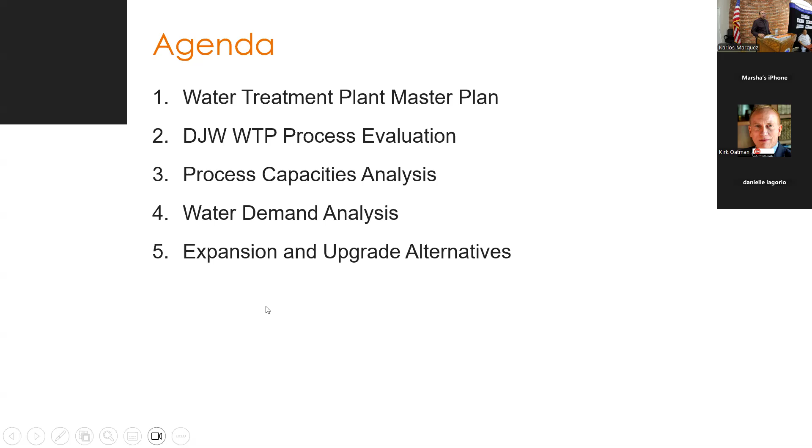Okay, so I'll try to be brief, I think I have about 20 minutes. Stockton East Water District, for those who don't know, is a wholesaler of treated water. We also assess for groundwater use and surface water use for agricultural customers. But we are, in essence, the main provider of drinking water to the greater city of Stockton.

From 1991 to 2011, Stockton East provided roughly 66% of the city's drinking water. Since then, after the city of Stockton built their Delta Water facility, Stockton East still provides about 56% of that drinking water.

We have two master plans that we've embarked on. One of them is the drinking water treatment plant master plan. It is an older facility, built in 1976. For decades we enjoyed the newness of new equipment, so we had a period where we were just cruising along. Now, however, after almost 50 years of operation, we have a lot of things in the pipeline, not only for repair and replacement, but also for improvements, looking ahead to the demands of the city of Stockton, as well as to improve water quality and address regulation, which is always present in the state of California.

So the first one that we'll go through is this master plan. It is being worked on in conjunction with Stantec, that's the consultant.

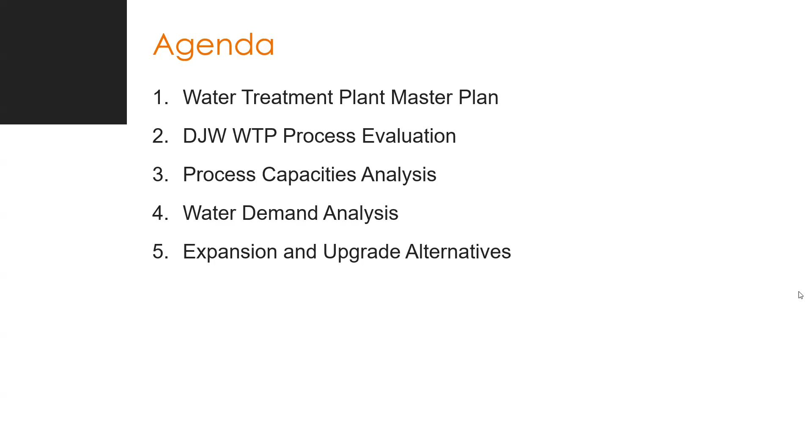I can't go forward. Oh, there it is. Okay.

So the purpose is to look at the treatment plant holistically and come up with a 50-year plan with a 20-year CIP. The plan is to improve the facilities or replace aging infrastructure within a 50-year span, but we're going to be more granular in the 20-year time frame and come up with actual numbers for budgeting purposes and fiscal planning.

The approaches were to manage, optimize, and sustain all water sources, which is very important in California, especially during drought years, and to operate, maintain, and modernize processes and facilities. This is an ancient facility, so that's very important.

So what is it that we are going to do now? We are going to look at all the original components, including some very expensive ones, which is the power side of things, some of the filters, and the flocculation and sedimentation infrastructure, which is fairly old, so that needs to be replaced in the near future.

The challenges, as always, are regulation, water sources quantity and quality, and the expectations from our customers, which as a wholesaler are the city of Stockton and Cal Water. We treat the water and send it to those two main entities, a little bit to the county of San Joaquin, and they're the ones that distribute it along their distribution system. They're the front-facing portion of drinking water; we're the back end. And the last two bullet points are land use changes and building codes.

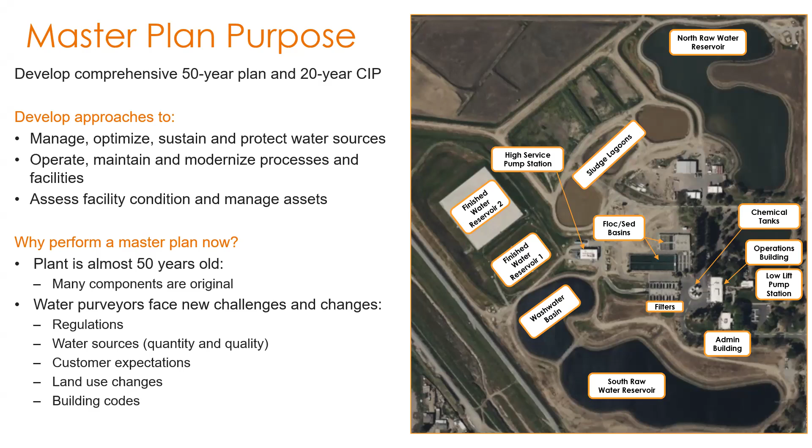This chart shows on a year-by-year basis what we've seen historically as far as average demand. As you can see, prior to 2013, we had a lot more demand because the city had not built their plant at that point in time. But recently, especially with some of the issues with tugboats and whatnot in the Delta, our demand has kicked up. There's also been more development within the city of Stockton, which has driven demand up significantly in the last few years.

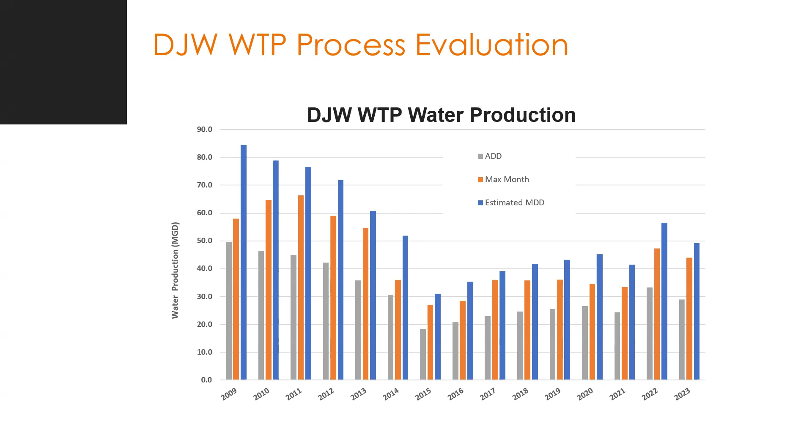So this is process evaluation. We have two sources of water that go to the treatment plant: one is New Hogan Dam, and the other is New Melones Dam. New Hogan is rain-fed, while New Melones is snow-fed. Snow-fed is always a better source of water, and as such it has less turbidity and less organics.

But when we go to New Hogan Dam, we do have some concerns from time to time with a lot of organic compounds in the water, and there's been historical issues with taste and odor. Now taste and odor issues are not noxious to health, but whenever anybody has anything unpleasant in their water, the public tends to panic a little bit. So we try to eliminate those, even though they're not any health hazards whatsoever.

So in order to combat some of those challenges, the master plan is evaluating new flocculation and sedimentation basins, which perform better to eliminate some of those organic compounds and turbidity. Granular activated carbon is used for taste and odor control, and the district has implemented fairly frequent changing out of that granular carbon. We do it right now every year in two intervals: at the very beginning for the previous year, and again 2 months later to make sure we have fresh carbon to address those issues.

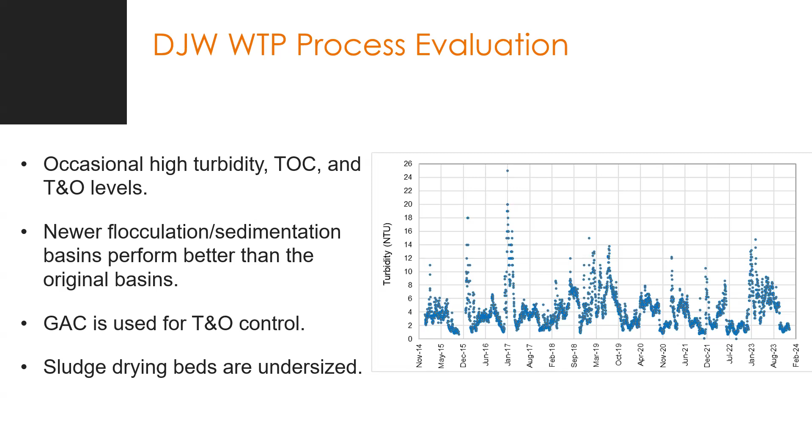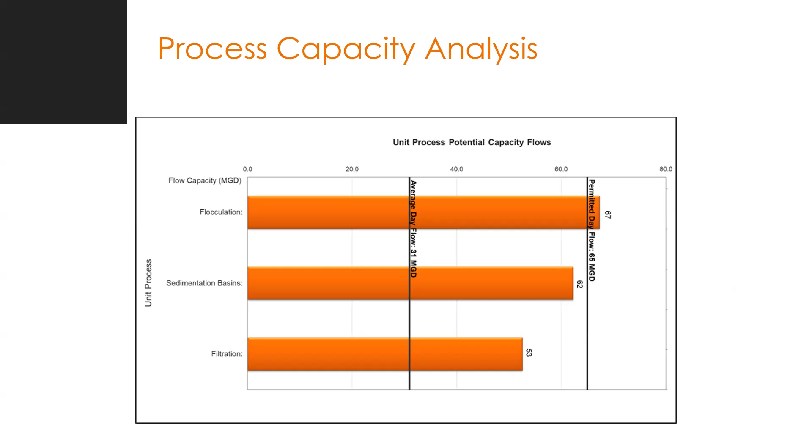As far as process capacity, the treatment plant is rated for 65 million gallons per day. For flocculation, we are actually a little bit above what the treatment plant is rated for, but we are a little bit behind when it comes to filtration and sedimentation, which are the other two processes when we treat water. So this master plan is aiming to modernize our facilities to make sure that what we're actually rated for is something that we can actually produce.

So I'll skip through these. These are just the options to get us to that point. And then this specific graph is...

This is a graphical depiction of how we deliver water to the city of Stockton. As you can see, we deliver to Cal Water, to the north side of Stockton, and to the south side of Stockton. The south side of Stockton is served a lot by the Delta Water treatment plant that the city of Stockton owns and operates.

In the last several years, we've had an uptick in that demand. So we have to look to the future and make sure our facilities are optimized for future increases in demand, which we're anticipating as well.

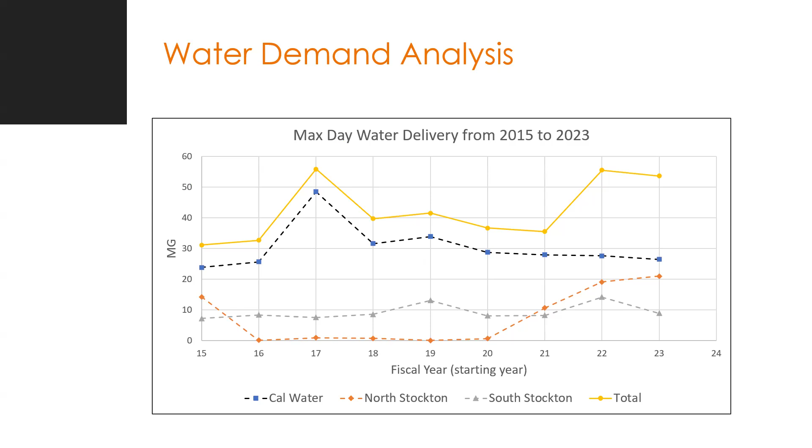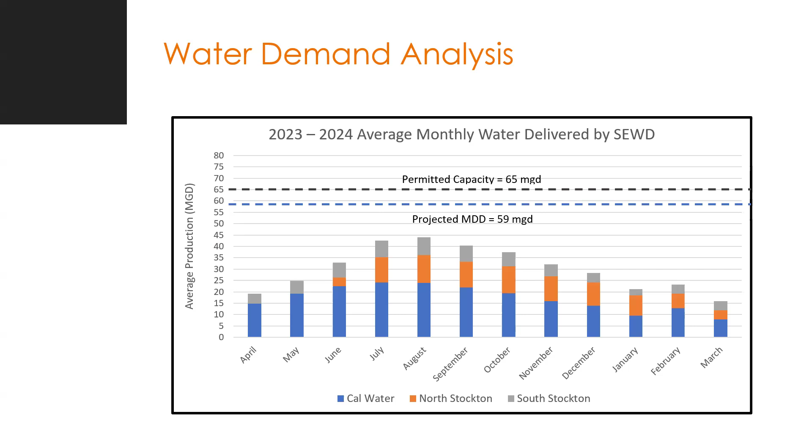But these options have been presented to those two entities and the county of San Joaquin. They're what we call the urban contractors. We have a contract with them to provide water. And so anytime we have anything major, these are going to be multi-million-dollar projects. Therefore, we try to engage them as early as possible to make sure that we get buy-in to come to a viable alternative.

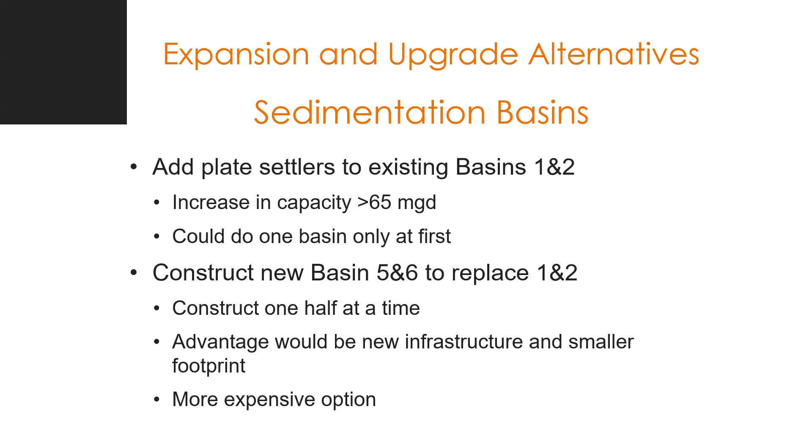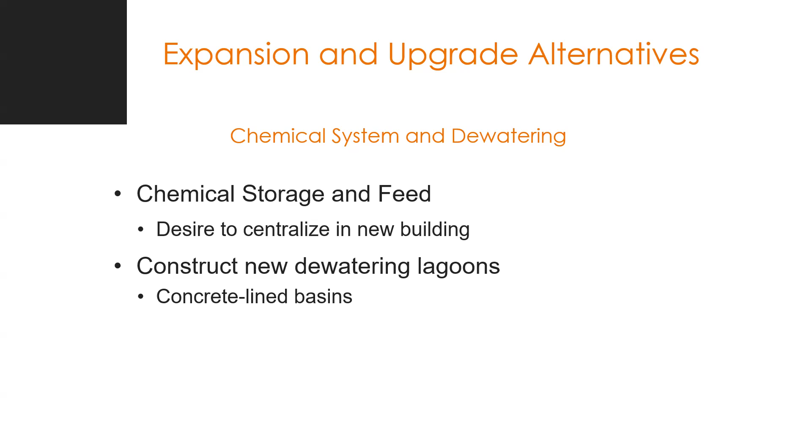And that's pretty much it for the water treatment plant master plan. Any questions? I know I went kind of quick, but if there's anything...

Yes, I have a quick question. You guys have assumptions, obviously projections in the future, 5 to 10 years. Obviously, business community, we're the attraction of businesses to our community, San Joaquin County or Stockton in particular. What are your projections? Because obviously water is a huge driver for economic development in our community. So what are your projections of the needs? Is it reliable? Are they doing any groundwater recharging, et cetera, and so forth?

Yeah, so actually, that part of our planning is more on the water supply side. This is more related to water demand. So as far as the city of Stockton and Cal Water, there's not a lot of growth on the Cal Water side, but there is a lot more on the city of Stockton side. We still don't think it's going to be a lot, maybe 2 to 5% growth in the next 5-10 years.

But the biggest concern, I think, is on the water supply master plan. As you'll see in the presentation, we do have a deficit that Stockton East and all the groundwater sustainability agencies in the area have to actually work together to address. Because I believe at one point in time, the agencies thought that we had a 70,000 acre foot deficiency. I think that's been refined a little bit more to be closer to 30,000 acre foot deficiency, but it's still a large amount of water when you actually start visualizing what an acre foot is.

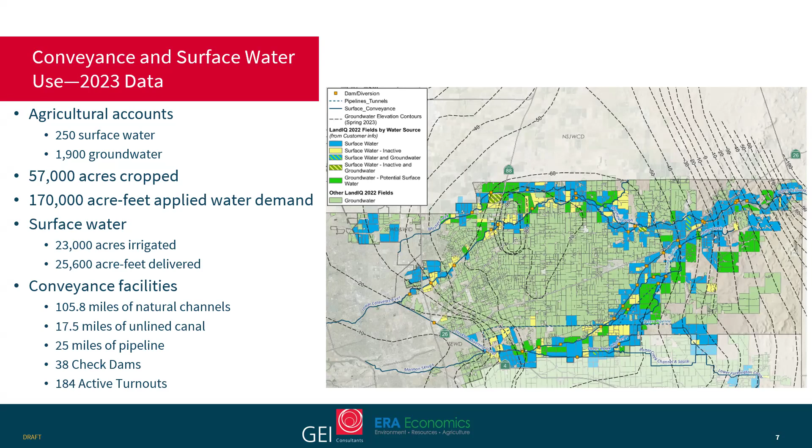Most land in the district is permanent crops, so trees, and as such the demand is relatively constant. We have what we have at this point in time, and unless land is put into use or taken away from use, that's the only thing that changes.

So the objective is to increase surface water use, particularly in the wetter years. A lot of times in the really wet years, we'll have an excess of supply, and we just don't have a lot of people that can or have historically used it. There's some people that can use it, and for whatever reason are not. There's some concerns by them, and so the district's mission has long been to increase surface water use.

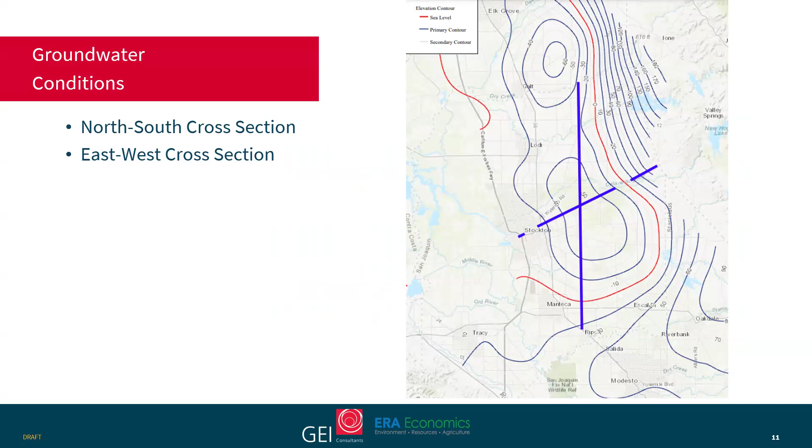As part of this master plan, the consultant looked at cross sections spanning north and south, and east and west, to get an idea of groundwater levels within our district. So you'll see this graphically. I believe this is the north and south — no, it's the east and west.

As we head east, you can see the bigger the gap between the lines, the more use there is in that area, and the more we encourage surface water to bridge that gap. The dotted line is the desired level that we have. The very top line is actually ground, the surface ground. So you see the big gap between that and the green and the black line. That's a big gap on the east, and the rest of the GSAs have to address it. So we have a deficit.

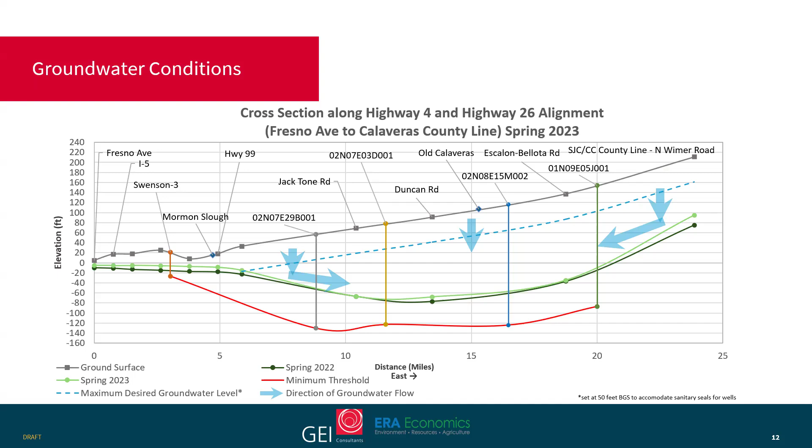That's something we do know and have to address. The further it goes east, the bigger the gap is. As we head west, closer to the delta, we have less deficit. The next cross section goes from south to north, and as we get north, the same thing happens — a big gap between the desired amount of groundwater and where we currently are. And the surface is really up high there.

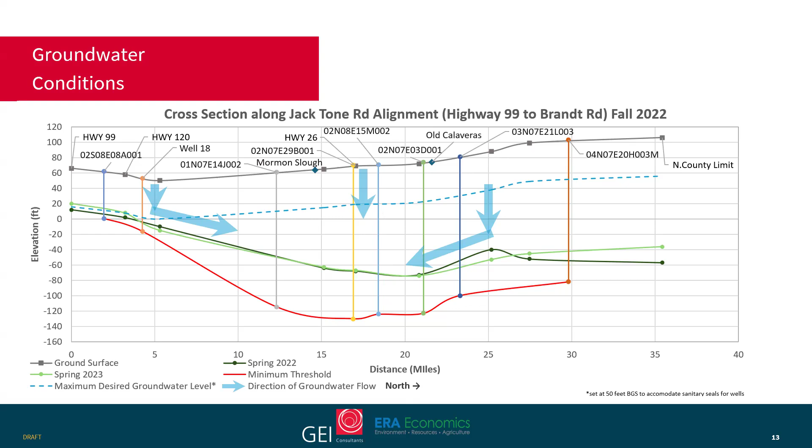So, as mentioned, what we want to address is recharge. There are two types of recharge. One is in lieu, which is in essence having users use surface water instead of groundwater. In order to do that, we have to entice our growers on the coastal side to use surface water when available.

We are trying to implement incentive programs where we actually help them with permitting, which is very costly, time-consuming, and technical. So we have engineers who have worked with the permitting agencies to get them through that process. We try to help them with some of the very costly infrastructure that goes into making the turnouts available, and then expand the distribution system to make sure we have more access and reach to some of the growers, to entice them to use recharge.

Then the other one is direct recharge, which is a term that is now, I think, very common — flood MAR, which is flood managed aquifer recharge.

That also includes dry wells and recharge basins, which means we'll hopefully find fields, partner with a customer, and flood the fields when possible. There's also tile drains, which we can use when they're going to crops. It doesn't negatively affect certain crops, and we can recharge while they still get water for the crops, hopefully providing an incentive for them as well.